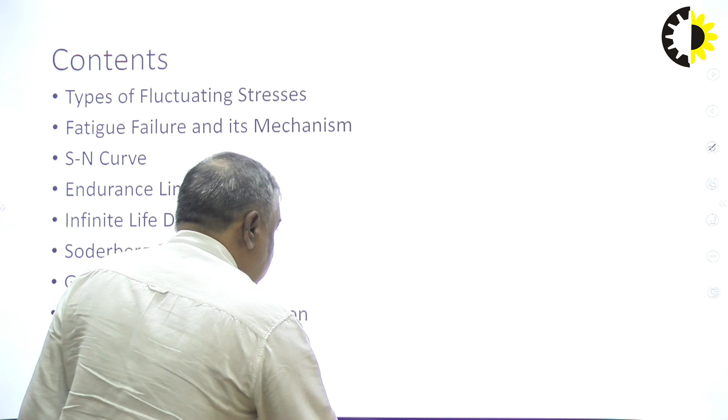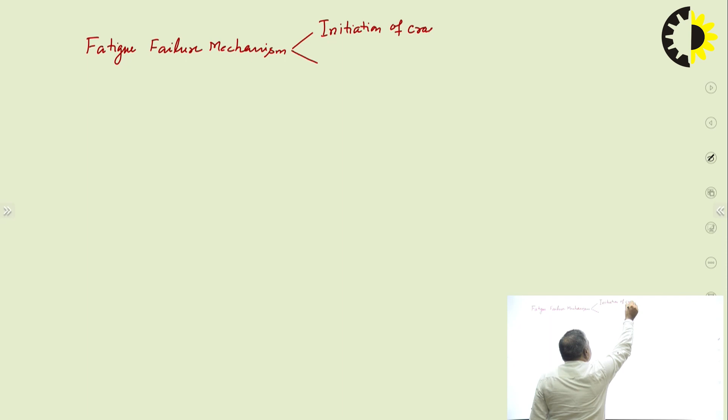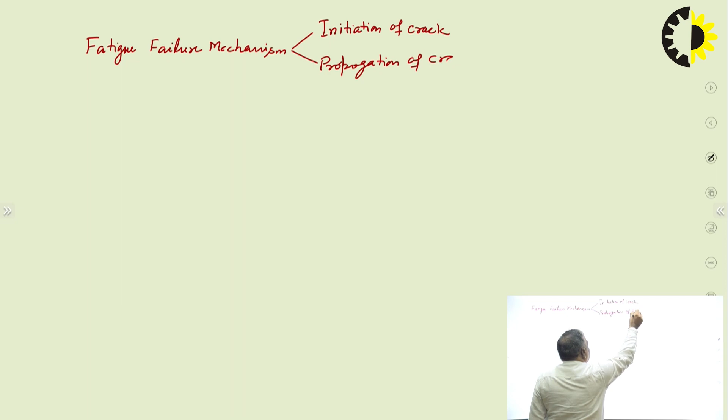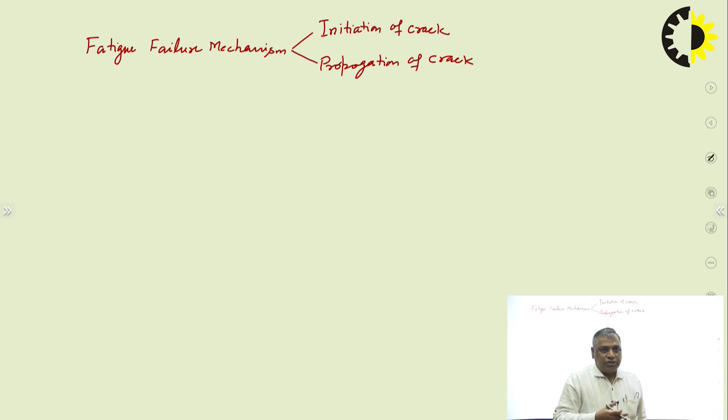So we should understand how it is possible that it fails below the yield point. The mechanism of fatigue failure takes place in two steps: first is initiation of crack, and further the propagation of the same crack. This initial crack may be a hair-like scratch on the surface due to machining, or a crack inside due to lattice defect or material imperfections. Composition may cause variation of strength - that may also be a reason.

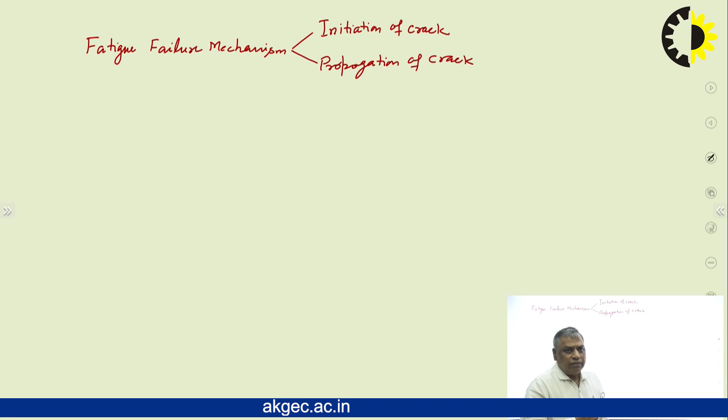As the crack propagates due to completely reversible stresses, consider stress sigma equals F upon A. From strength of materials, engineering mechanics and material science, we understand we are always interested in the maximum magnitude of stress or maximum load that will come during application, which is to be borne by the element. If the designed member is able to bear this maximum force, then the design is good. So engineers are always interested in the effect of maximum magnitude of forces, sigma equals F upon A.

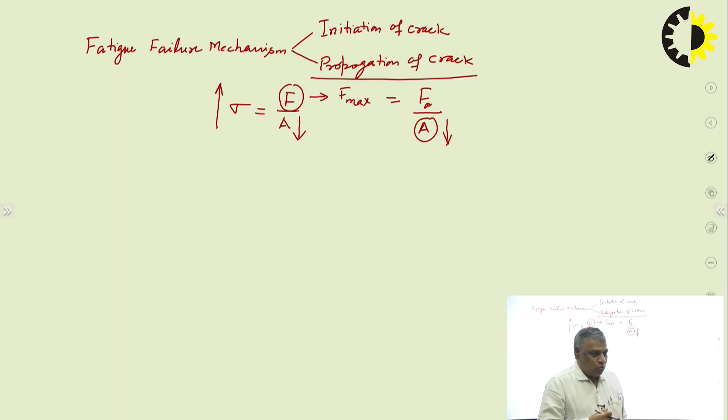As this crack propagates, the area gets decreased, while the magnitude of force F remains the same, F max. In case of completely reversible stress, we are interested in the amplitude force Fa divided by this area. If the area decreases continuously, then the stress level increases continuously. So it would seem true that material can fail below the yield point.

However, it is observed that loading is not up to the yield point in uniaxial tensile testing at UTM, and yet it fractures into pieces. So what actually happens is due to this reduction, which I am not able to observe if it is internal rather than external - the area keeps reducing continuously, stress keeps increasing, and at a certain point this induced stress reaches a point where it becomes above the strength of the material, and it fractures into two pieces without any warning. This is called fatigue failure.

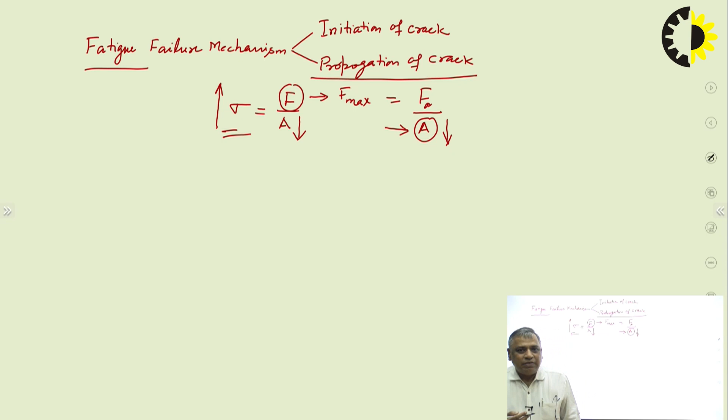So I think it is clear what the mechanism of fatigue failure is and how it fails below the yield point in more than 90% of cases. In fact, it is due to this propagation of crack - as the crack propagates, the material available to hold resistance continuously reduces, and the area gets reduced.

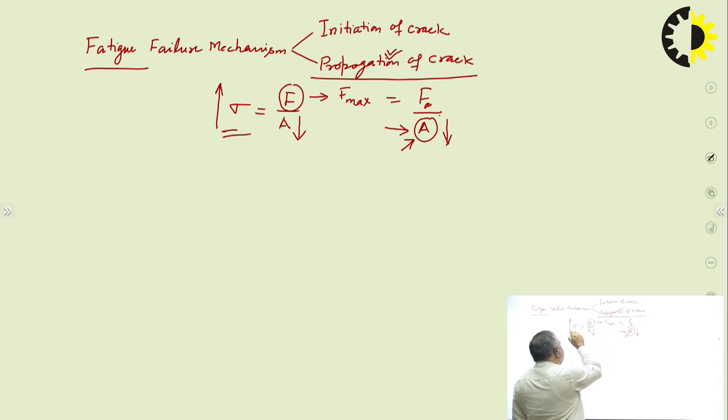So to design elements subjected to fluctuating types of loads, it is very important to understand: can we use the same strength, the same material properties which we used in the design of members subjected to static load? Definitely not. We have to select another material property to design elements under this kind of loading.

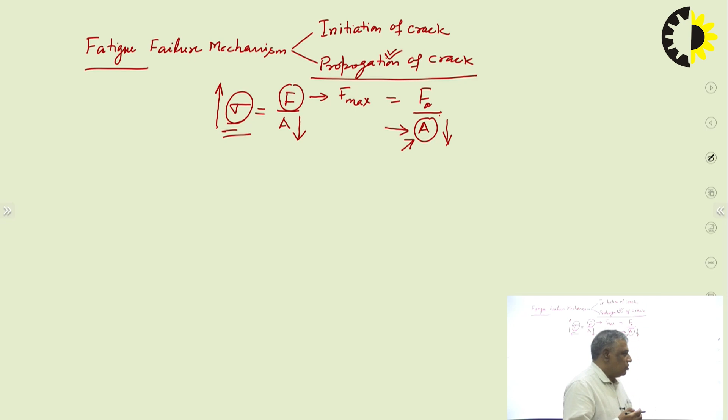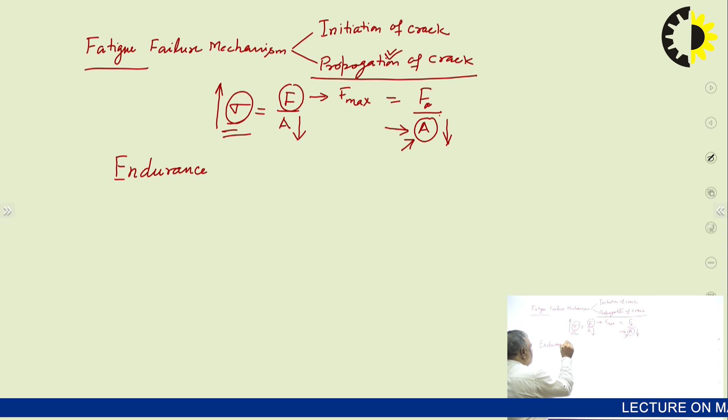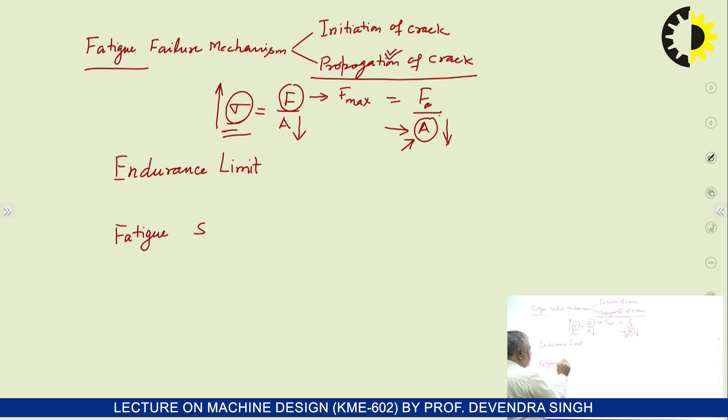That strength is the endurance limit, and another is fatigue strength. So what is endurance limit? Endurance limit is the maximum magnitude of completely reversible stress.

In fact, it will be the amplitude stress, and in case of the complete reversible stress that can be applied on the member for its survival for more than 10 to power 7 cycles of reversal.

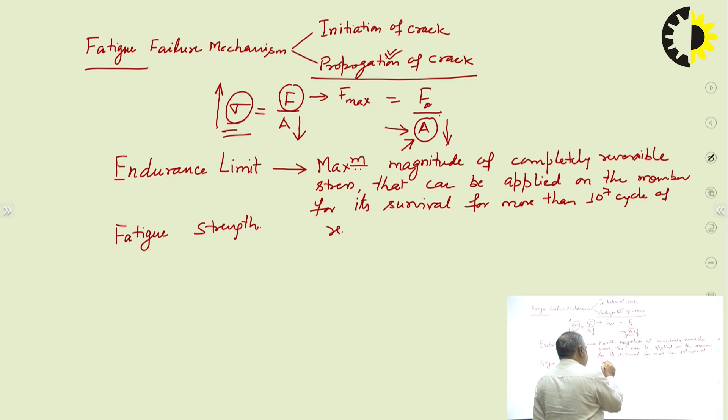If any element or any member survives for more than 10 to power 7 cycles of the stress reversals, then it is called the infinite life. It is called infinite life. If it fails earlier than 10 to power 7 cycles, then it is considered as the finite life.

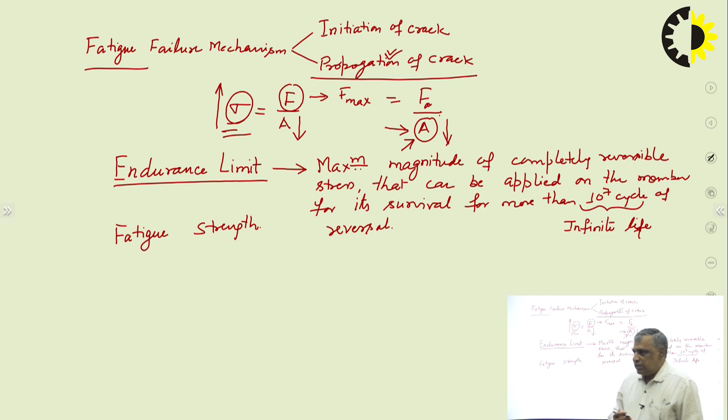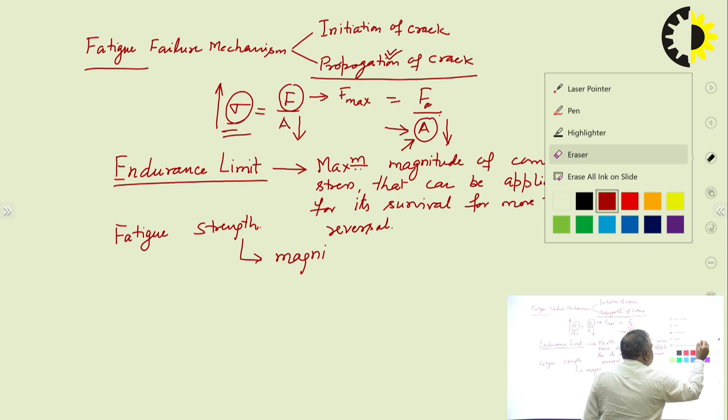So, if we consider the endurance limit to design the member against this fluctuating load or completely reversible stresses, then it is infinite life design. The fatigue strength is the magnitude of amplitude stress, I should write here, of completely reversible stresses.

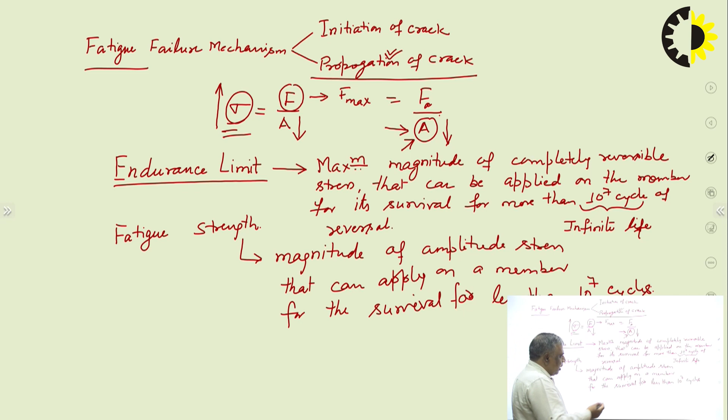That can apply on a member for the survival, or survival for less than 10 to power 7 cycles or reversals of the stress. It can be anything. So that is called the fatigue strength.

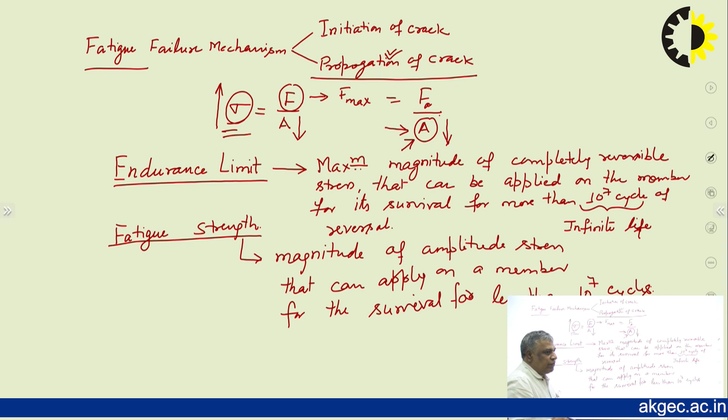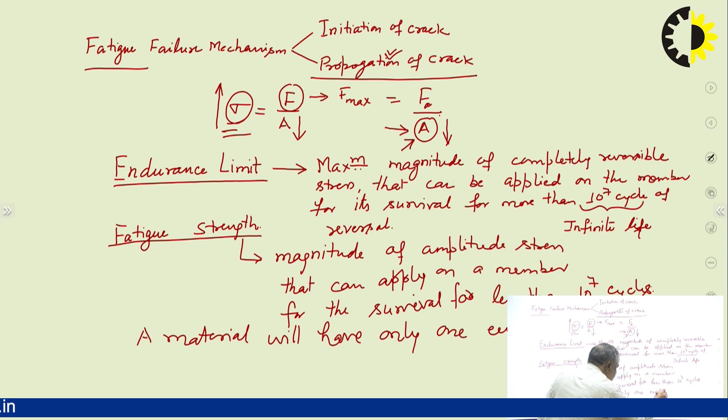So from these two definitions, it should be very clear. A material will have only one endurance limit. This is one point. A material can have only one value of the endurance limit.

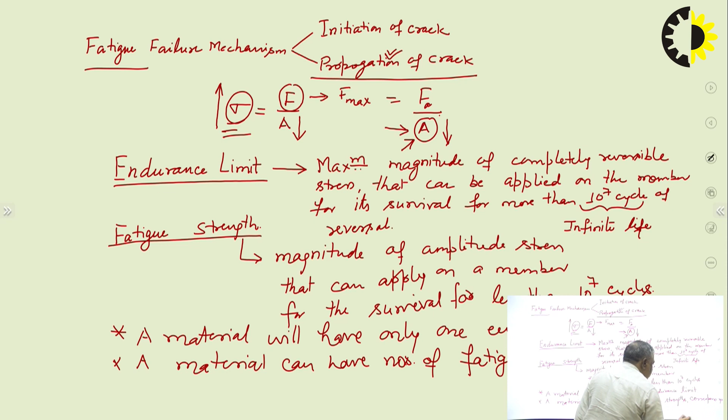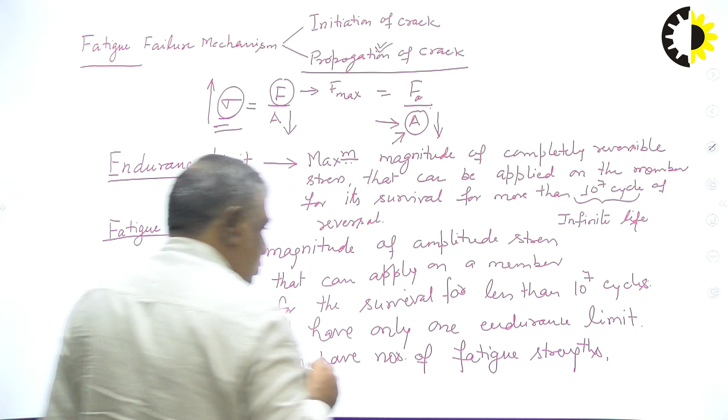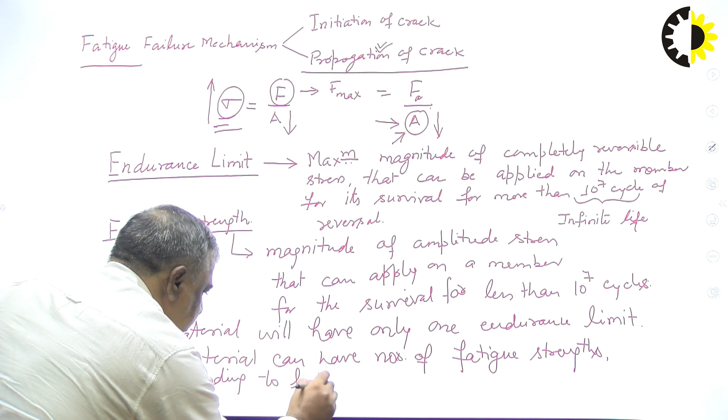And second, a material can have numbers of fatigue strengths corresponding to finite life. Finite life means the survival for less than 10 to power 7 cycles, may be 10 to power 3, 10 to power 4, 6000, 7000, 8000, etc.

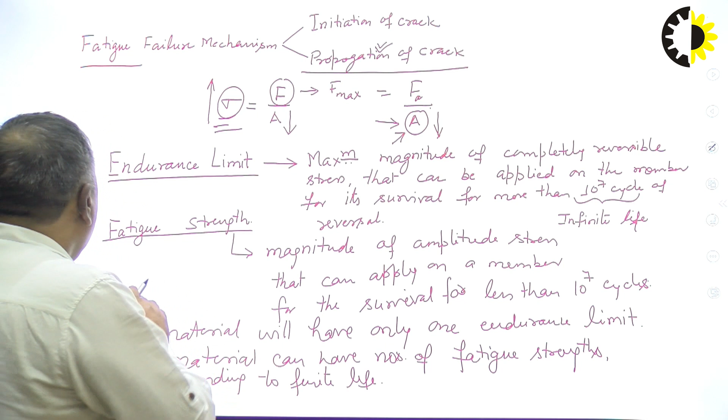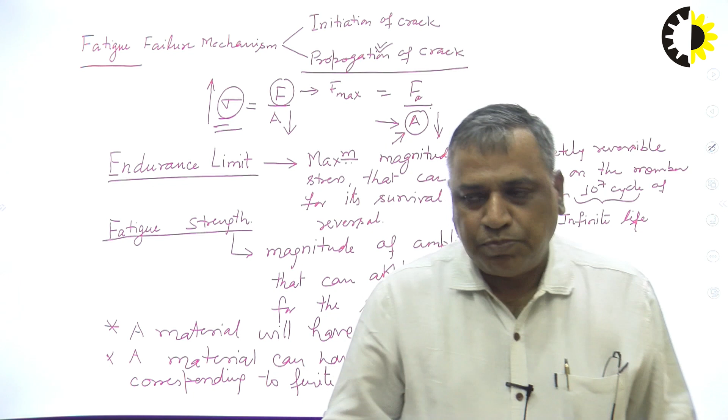Now the problem is, how will you define the endurance limit and how will you define the fatigue strength? So we will try to understand how we will decide the endurance limit and fatigue strength of a material. For that purpose, we need to draw the SN diagram or SN curve. Now we will discuss the SN curve.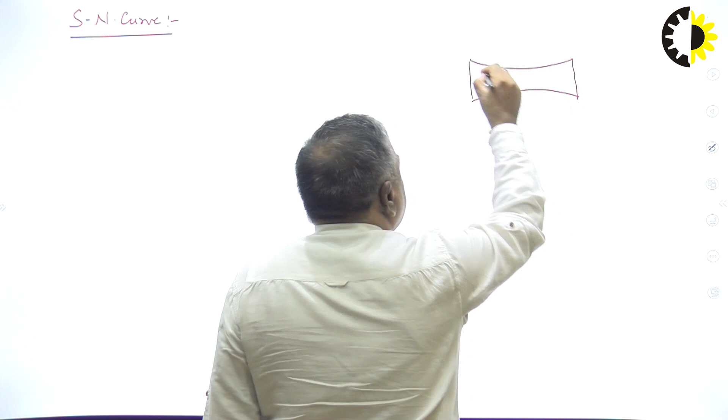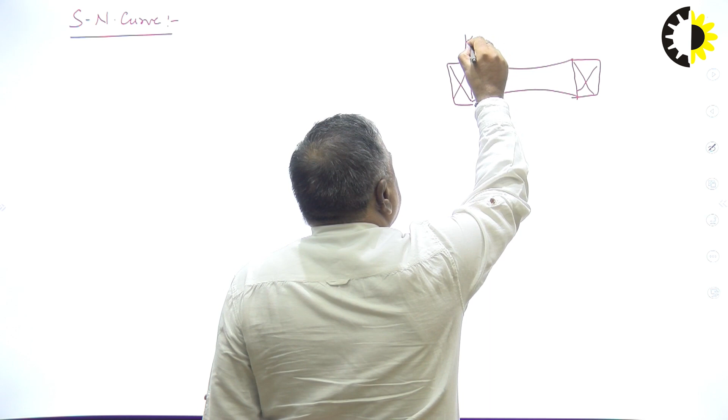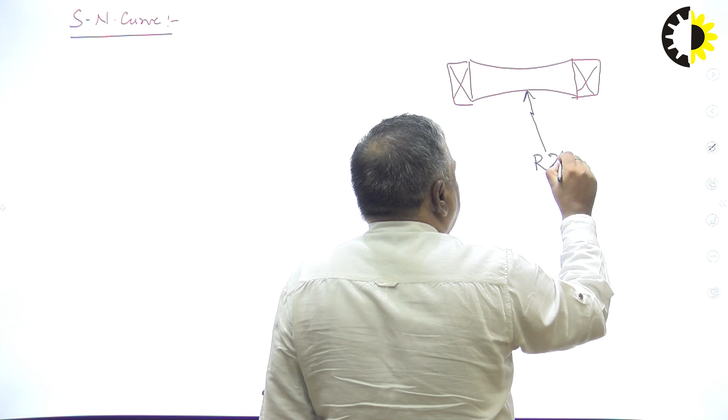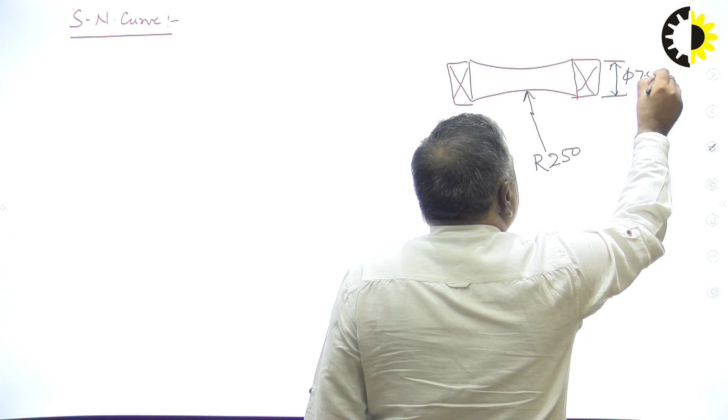R.R. Moore has performed a bending test on a high speed bending testing machine on a specific specimen of 85 millimeter length. This is R250, right, and this is phi 7.5, and this length is 85 mm. All dimensions are in mm.

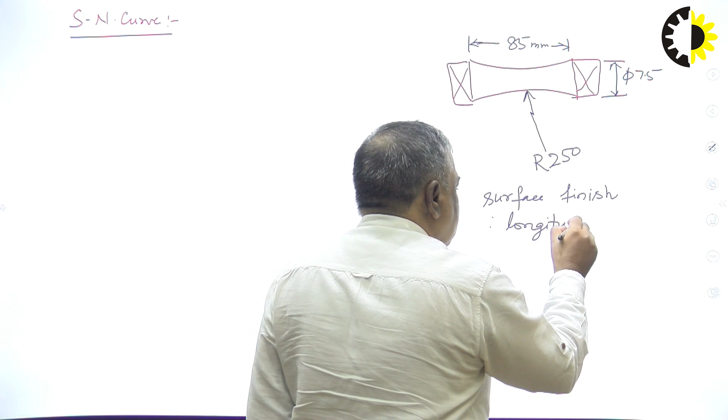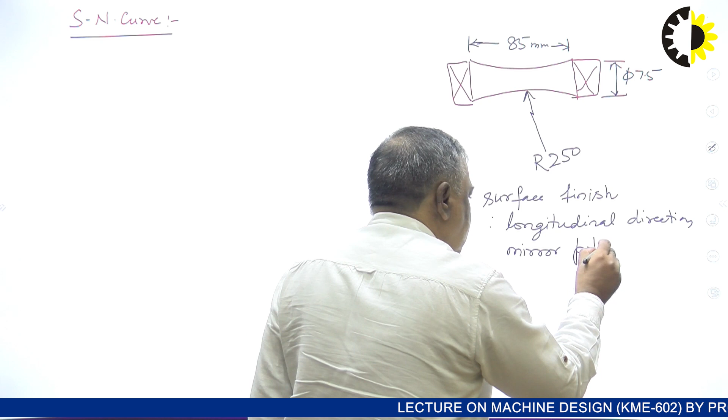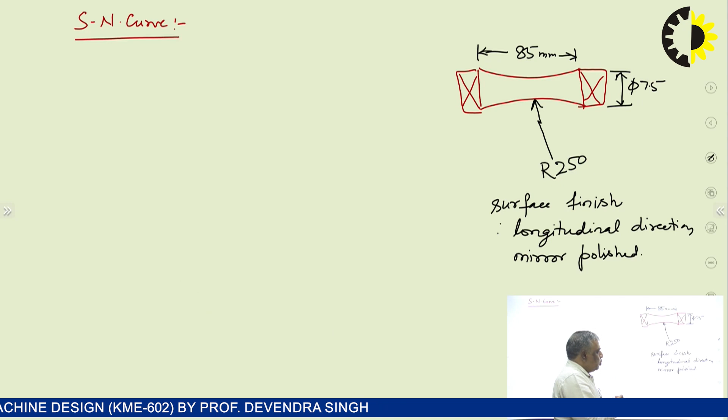This is, and the surface finish is in longitudinal direction, mirror polished. When we will discuss about the factors to modify the endurance limit, then we will discuss why it is essential to make this specimen with mirror polished surface and longitudinal direction. This is to avoid the stress concentration effects.

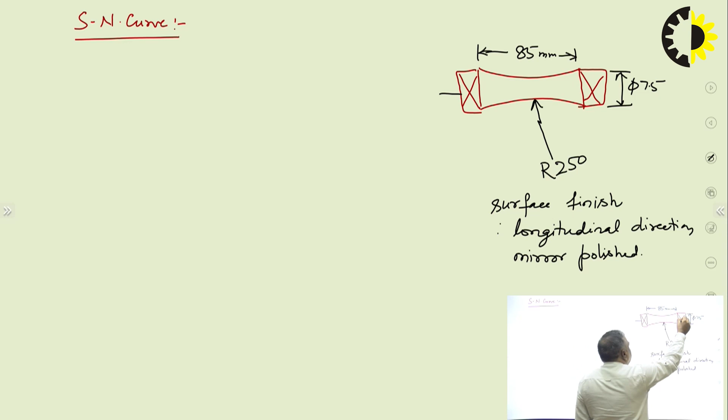Then the size effect, this is R250 radius, curvature, etc. And then this will be rotated with a high speed machine, and it is subjected to a transverse load W. This load will be changed, and the RPMs or reversals will be counted at which it failed or got fractured. Then we plot a curve between the load at which it got fractured and the corresponding number of stress cycles it has completed, and the curve obtained is called the SN curve.

Another important point about the SN curve: it is plotted on a log scale. If we plot it on the normal graph paper, then it was not giving a knee point. That knee point is required to get the value of the endurance limit. It will be clear when we see the actual diagram.

So, first on the ordinate axis, here this will be log10 SF, fatigue strength, fluctuating load, completely reversible. If a shaft is rotated, this is a simply supported beam. For example, we apply a transverse load, the upper fiber is subjected to compression, lower fiber is subjected to tension, and if this is circular in cross section, then the distance of the extreme fiber will be at a radial distance, and the centroidal axis will become the neutral axis.

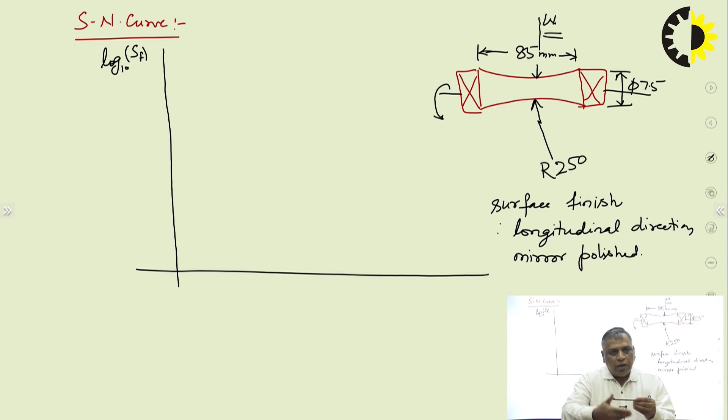So, the same happens here. So, if W is equal to SUT or more than SUT, if it is SUT, then zero cycles it completes.

This is n number of reversals, base 10, this is SUT, base 10. Here it gets failed. Now we will slightly reduce this W.

We will reduce the magnitude of this transverse load, first SUT. For example, if SUT is 1000 Newton per mm square, then the next it will be 980, 970, 960, 950 and so on.

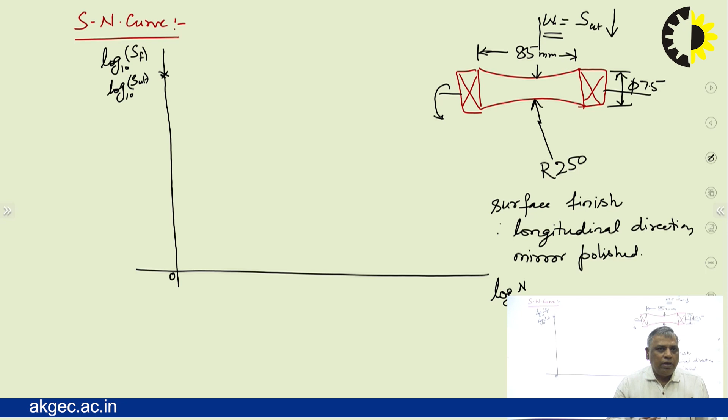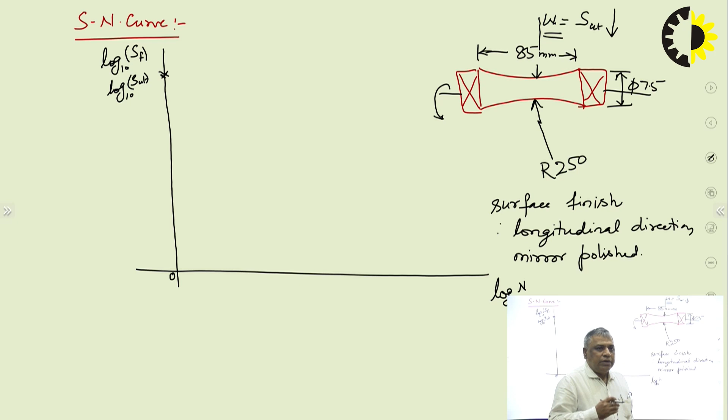Corresponding to each load, we will observe the number of rotations, number of reversals till the stress has been completed, and if we plot, we will get a number of points. These are the failure points. So if we join these points, a straight line on the log curve will appear.

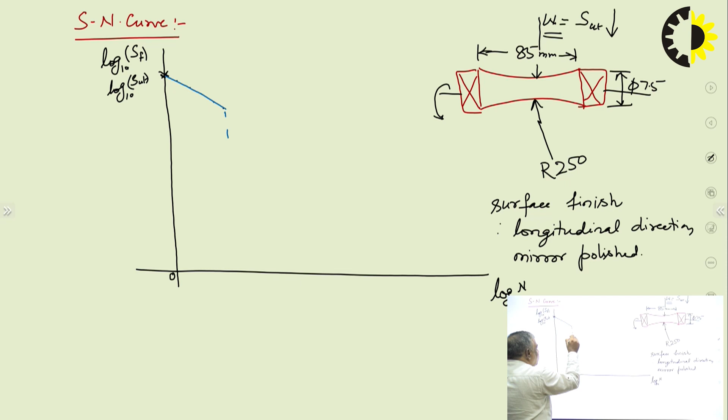And after a certain time, if you see, it will be somewhere at power 10 to power 3. So I will write this is 3 on the log curve. This means 10 to power 3 cycles has been completed and it gets fractured here.

This is the failure line effect, and it has been observed that this point is nothing but 90% of SUT of the material.

Then as we move further, the nature will change a little bit. These points will be like this, and if we join these points, these are the failure points corresponding to the load W. This is like this, this is like this.

At this point it lies between 10 to power 6 and 10 to power 7, between 6 and 7. For numerical purposes, for safe design, we will consider this is around 6. This point we have reached here.

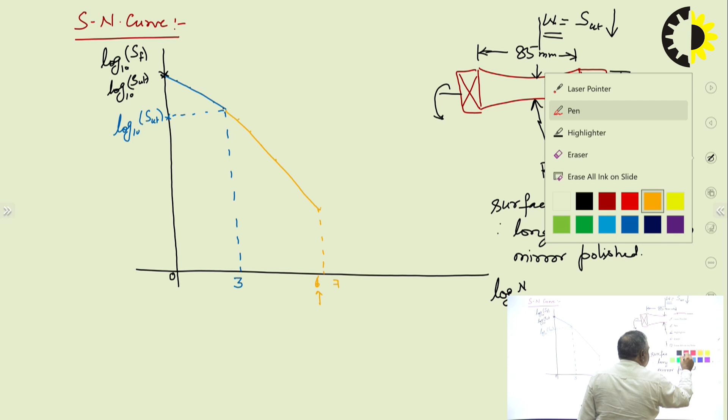Here, this will become straight. Now the failure points become parallel to the abscissa. This will become like this. These are the failure points. Now it is not going down.

So this is the SN curve. This is the knee point. This is the knee point about which I was talking in the last slide.

If the loading is below this, then we are not observing failure, and it will survive for more than 10 to power 7 cycles. Then it is considered an infinite life problem or infinite life design. The material is said to survive for infinite life, and corresponding to this knee point on the strength axis, this is nothing but S prime E.

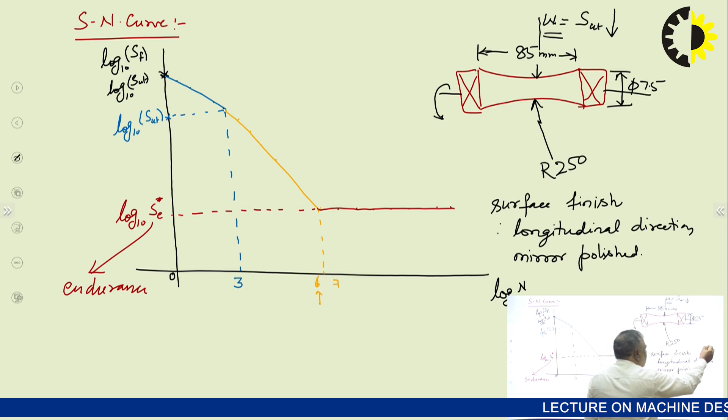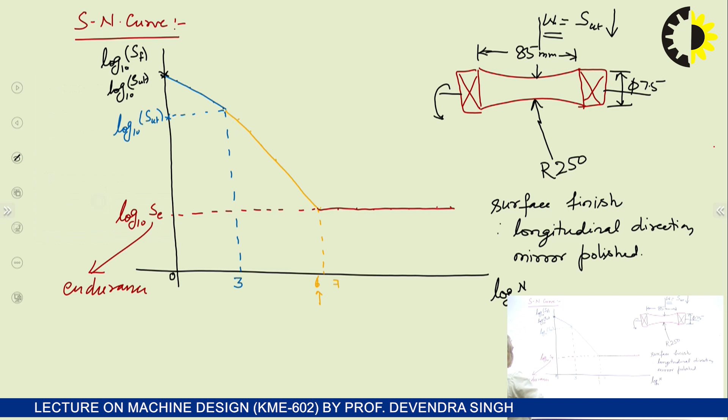This S prime E is the endurance limit. This is the endurance limit, and we will mark it prime later. This is called the endurance limit.

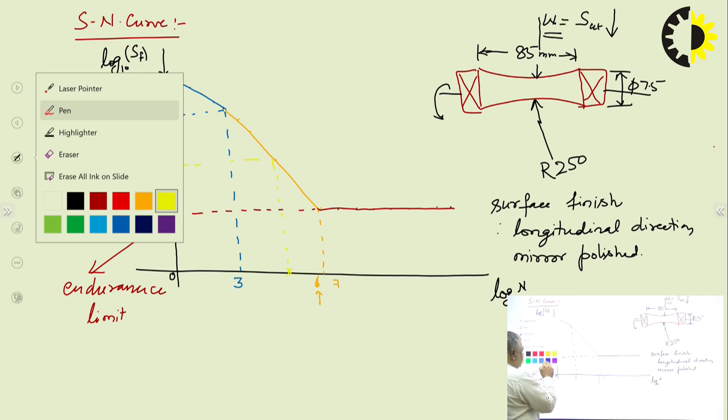So we will get a single value from these experiments, but if we apply the loads and observe, for example here at 10 to power 4 cycles, these are the failure points, we will get some value. This is log 10 SF. If you apply some other load, you will get this is suppose 5. Now if load increases, you get this is 4, and corresponding to this failure.

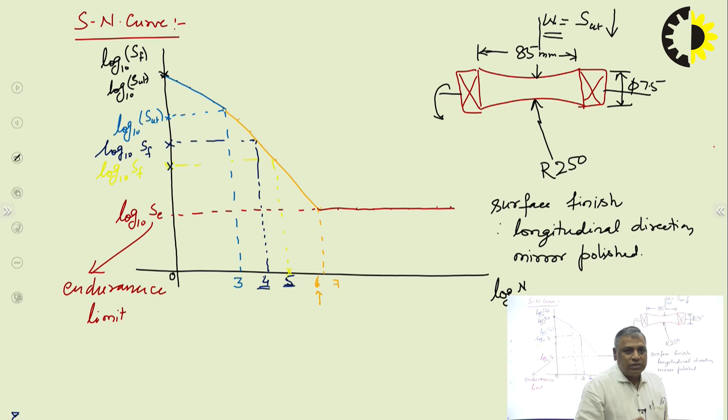So it means this is a strength corresponding to this number of reversals or this life. It means a material can have a number of fatigue strengths, but the endurance limit will be only one. It is clear from here.

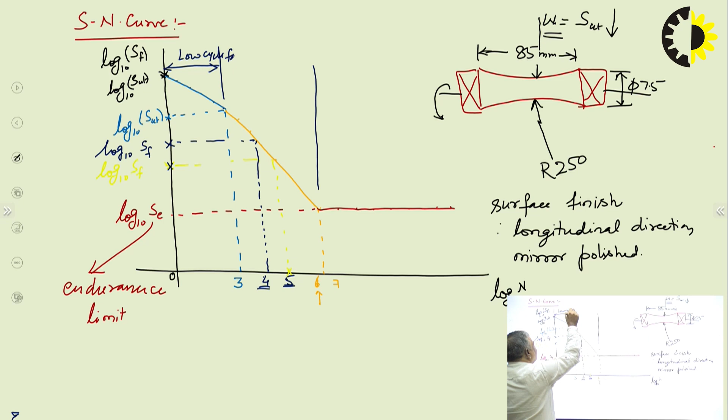Now, this is low cycle fatigue. This portion is considered as low cycle fatigue, only survival for 10 to power 3. Then beyond this, this is called high cycle fatigue. High cycle fatigue.

And if the design is up to this portion, it is called finite life design. If our design is up to 10 to power 6 cycles, it's finite life design. And beyond this is called infinite life design. So from here it is very clear that finite life design will be based on the fatigue strength, and infinite life design is based on the endurance limit.

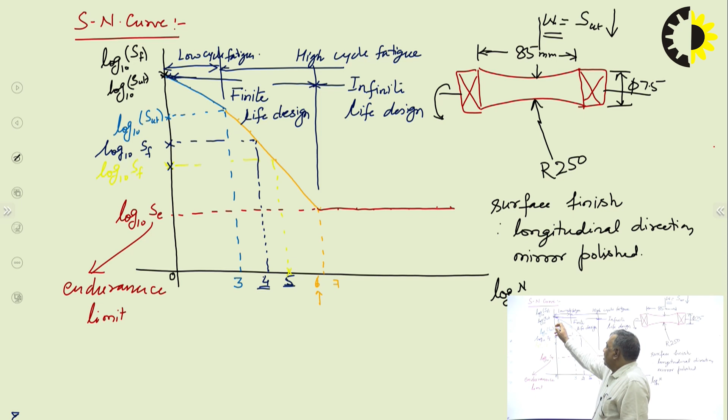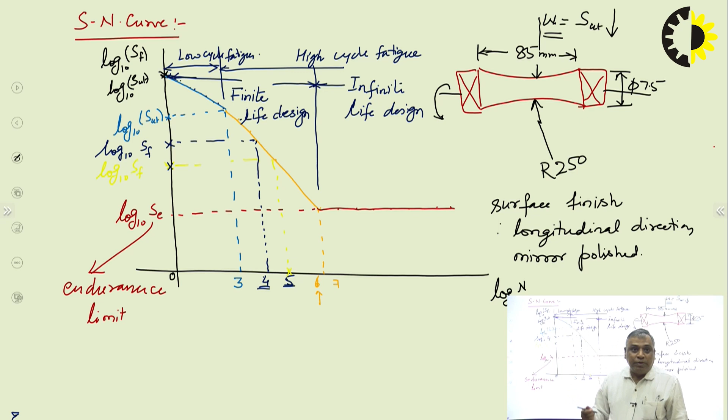Another point we can observe from here: we have broken the specimen here, here, here, here, here, a number of points. These are the arbitrary points I have shown. There may be 100, maybe 1000 specimens we have broken. So this is an expensive, time consuming process to determine the endurance limit.

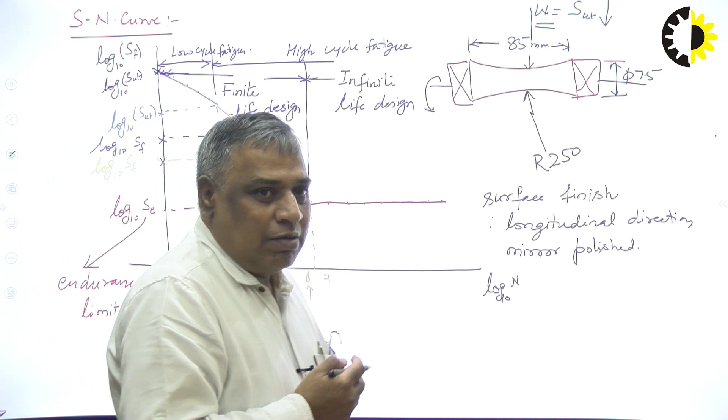So we have to think about a way we can find the endurance limit of material, because whenever we change the material, we need to find out the endurance limit for that material. So we must have some way to determine the endurance limit from a single simple tensile test at UTM.

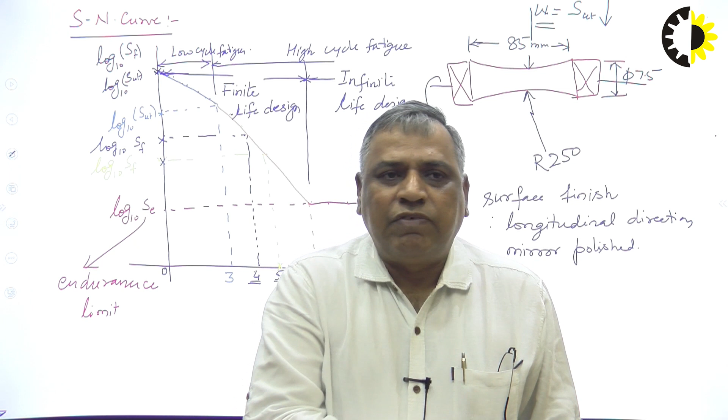So today we have discussed about the SN curve. In the next lecture, we will discuss about the way to determine the endurance limit from the material properties available in our database, based on the UTM test. Thank you very much.